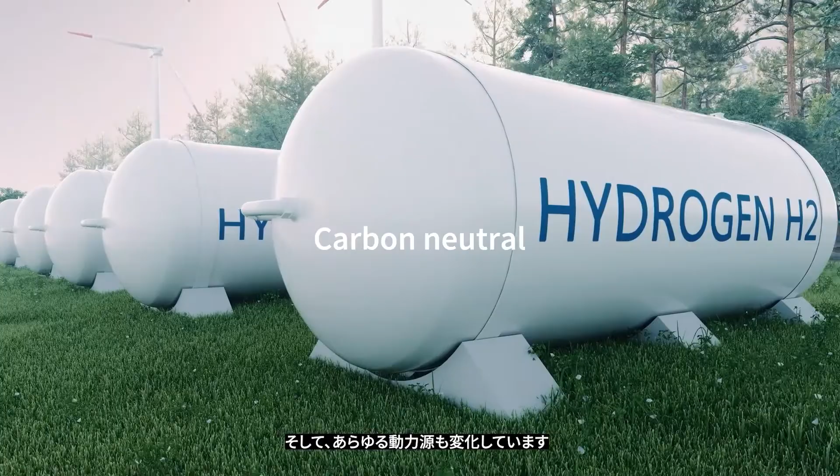Superconductivity transforms the relationship between society and carbon neutrality in the mobility sector. Let's take a brief look at the Toshiba superconducting motor technology revolutionizing the airline and transportation industries. The world is shifting from fossil to green fuels in an effort to achieve carbon neutrality. This also means changing every type of power source. Numerous domains have begun adopting new technologies to foster this shift.

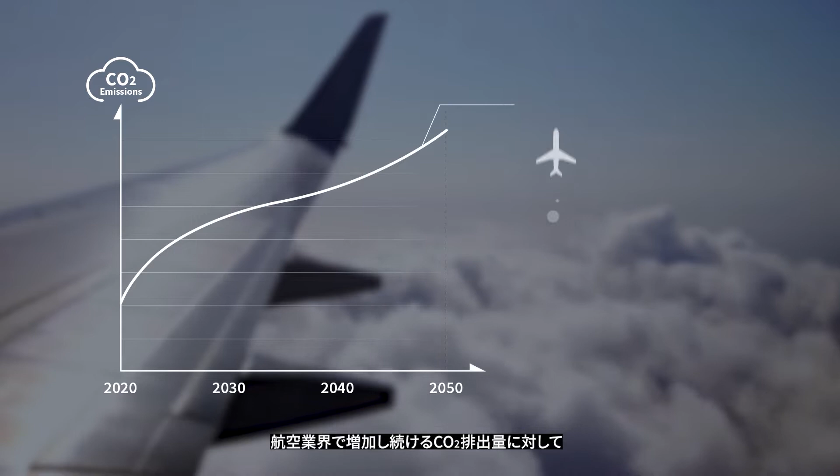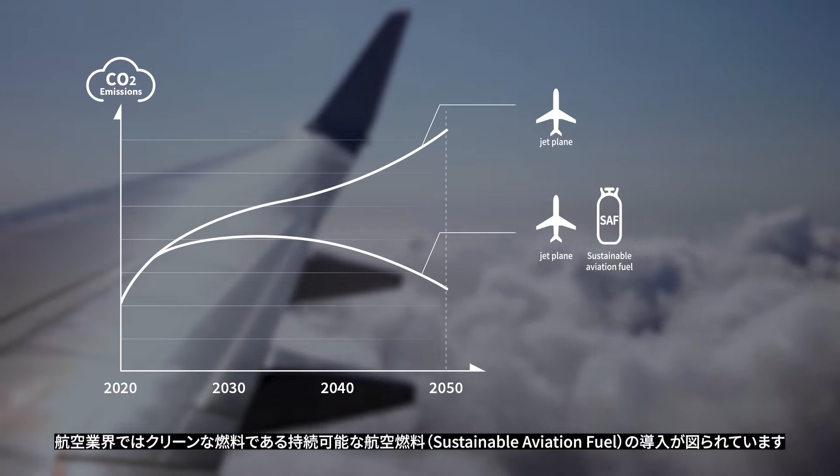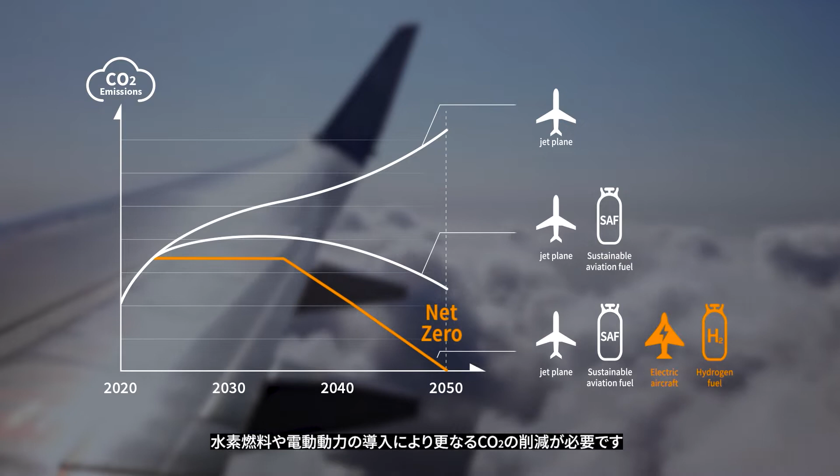The airline industry must significantly reduce the total CO2 emissions from aircrafts, which continue to rise. The airline industry is adopting Sustainable Aviation Fuel, or SAF, as the green fuel for aircrafts to reduce airline emissions. However, further reduction of CO2 emissions to achieve net zero emissions by 2050 necessitates the adoption of hydrogen fuels and new electric power sources.

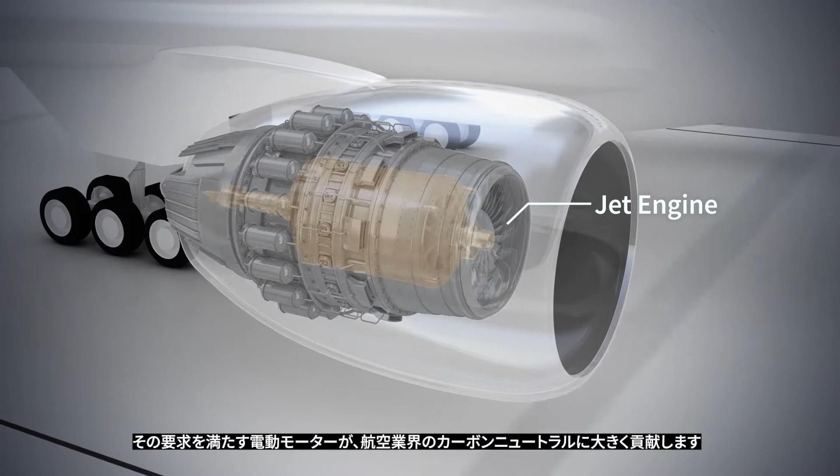SAF and hydrogen will become standard fuels in the airline industry, aiming to achieve carbon neutrality. Aircrafts will transition from engine to electric motor drives. These electric motors must pack unheard-of power, yet be lighter than ever before. An electric motor able to satisfy both of these requirements will contribute immensely to carbon neutrality in the airline industry.

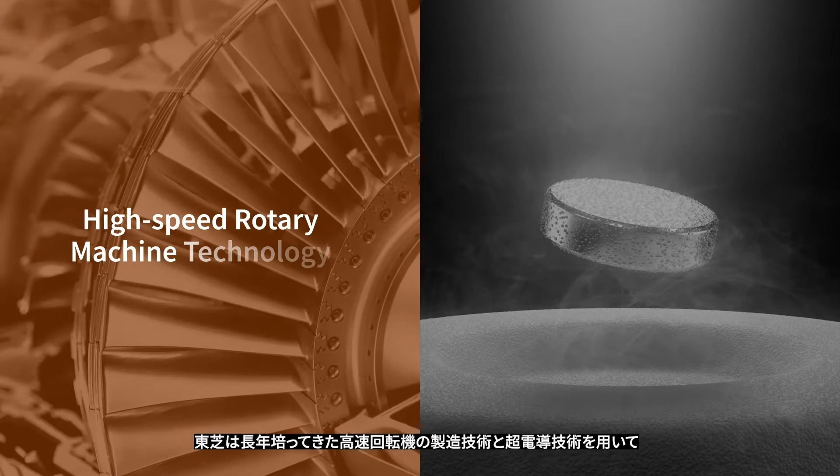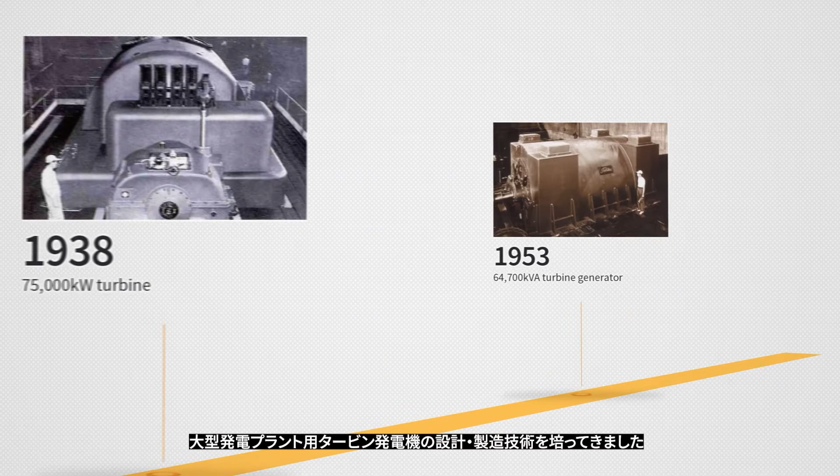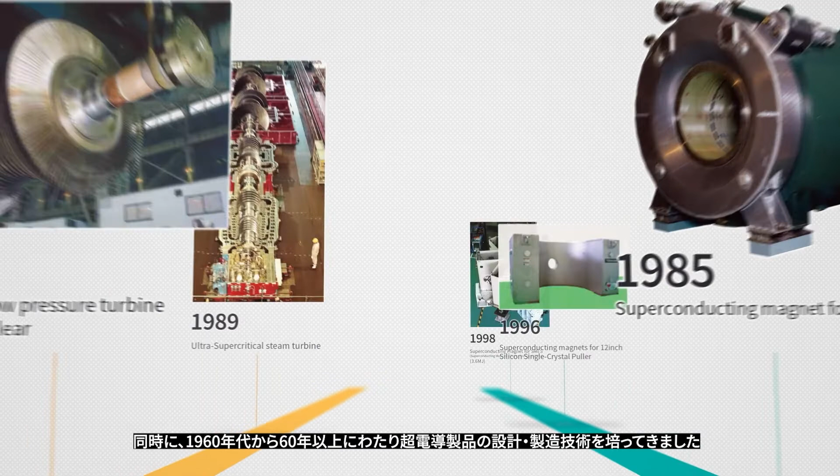Toshiba is utilizing its manufacturing technologies for high-speed rotary machines, as well as its superconducting technologies cultivated over many years to achieve the ideal motor. We have amassed design and manufacturing technologies for large power plant turbine generators for more than 90 years since 1927. At the same time, we have been accumulating design and manufacturing technologies for superconductive products for more than 60 years since the 1960s.

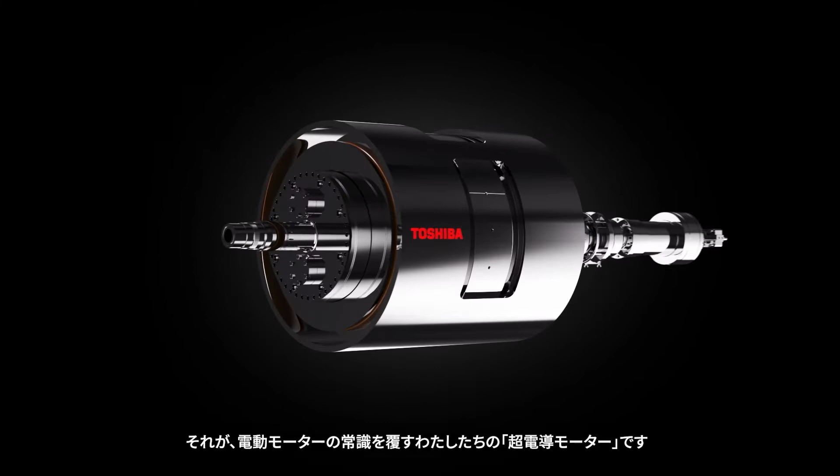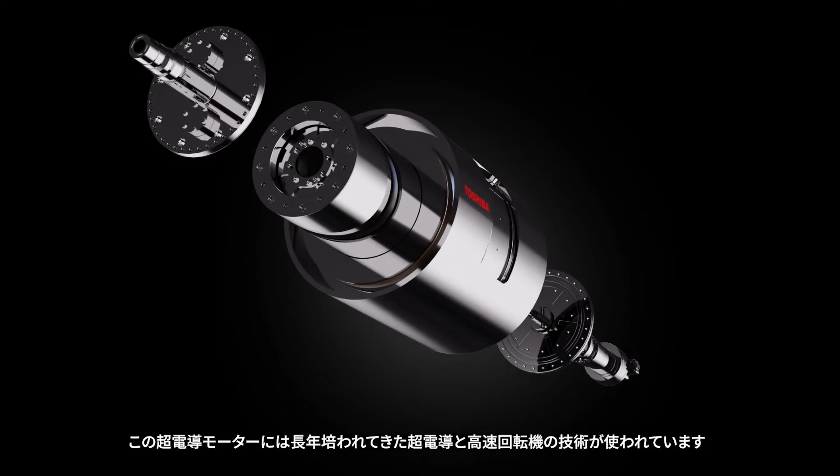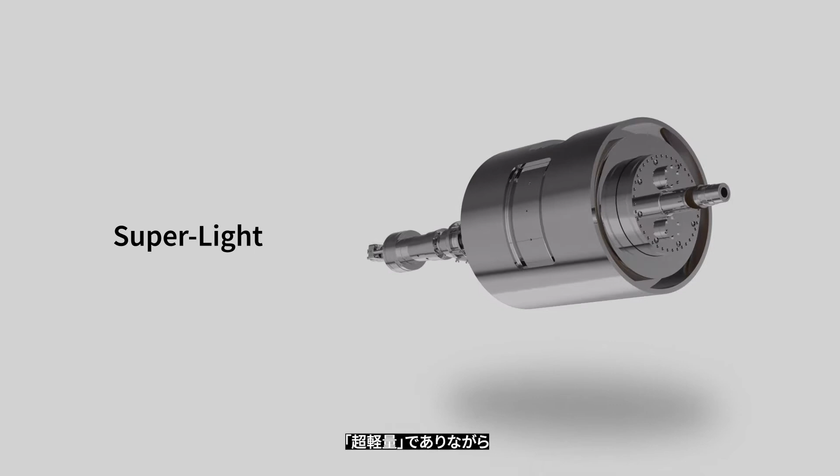By integrating these high-speed rotary machine and superconducting technologies, Toshiba succeeded in a superconducting motor revolutionizing the electric motor. This new superconducting motor leverages all of our hard-earned expertise in superconducting and rotary machine technologies. Our superconducting motor is super compact. Our superconducting motor is super light. Our superconducting motor has a 2 megawatt class output.

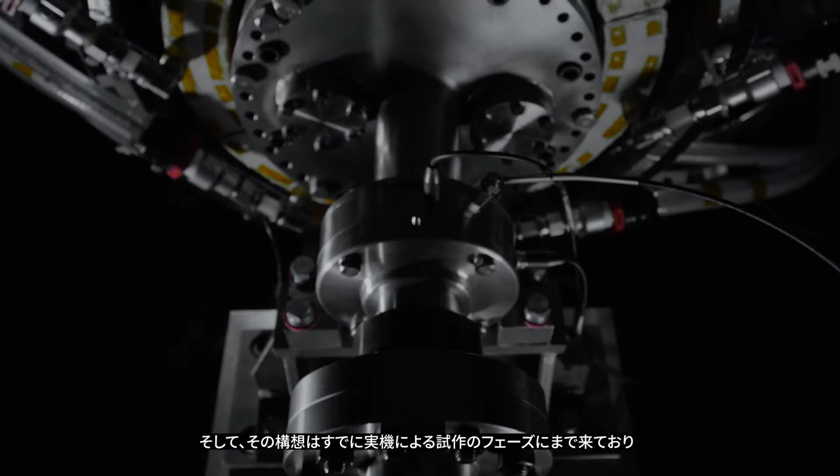Moreover, a prototype of this mechanism has already entered the proof of concept phase, which is a major step toward realizing a revolutionary electric motor. Motor innovation is an extremely difficult challenge, but a project which will open possibilities for a new generation in motors.

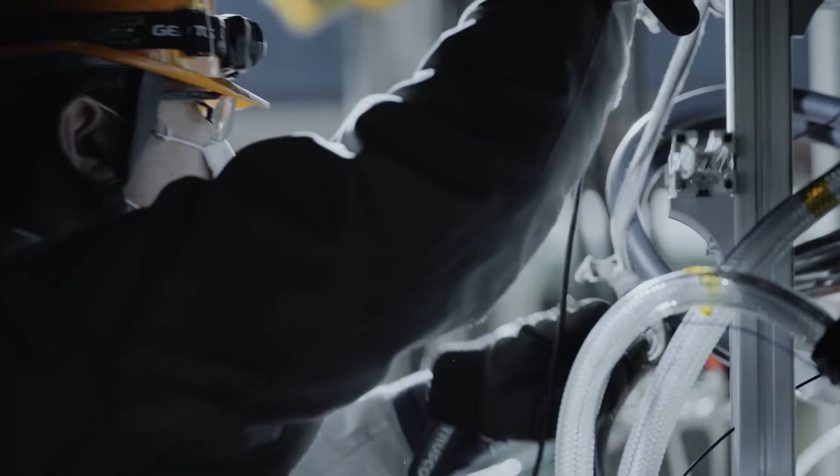Extremely skilled technicians have built a prototype that satisfies the required specifications. Realizing the necessary new technology involves a lot of trial and error. Toshiba has completed a prototype of superconducting motor that has not only high output power, but also high speed.

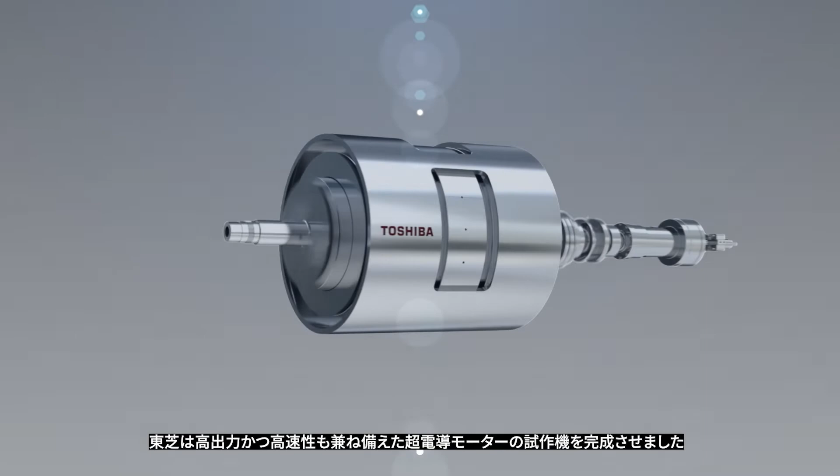Airlines are only the first sector in the mobility industry that this project is taking on toward carbon neutrality. Toshiba wants to take advantage of these refined technologies. Why not join us on this journey?